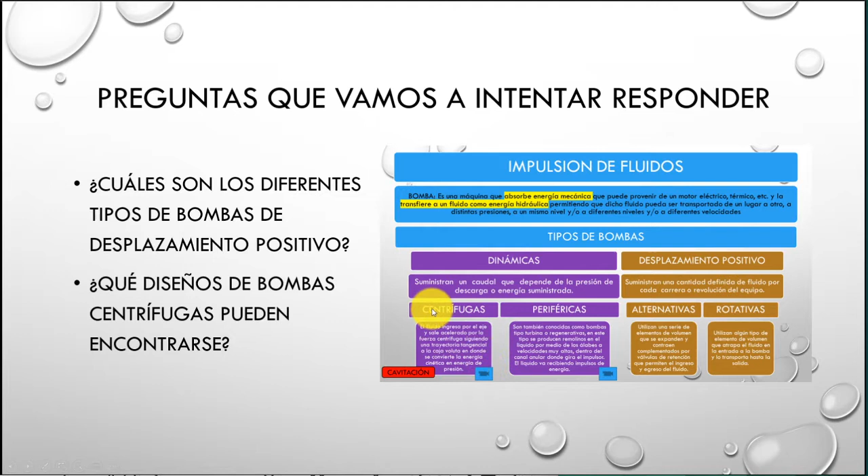Como vimos en el video anterior, hay dos grandes grupos de clasificación de bombas. Por un lado tenemos las bombas dinámicas y por otro lado tenemos las bombas del tipo de desplazamiento positivo. Ahora lo que vamos a hacer es avanzar en los distintos tipos de mecanismos de funcionamiento para los dos grandes grupos de bombas de desplazamiento positivo que vimos anteriormente, que eran las bombas del tipo alternativas y las bombas del tipo rotativas.

Así que ahora vamos a ver un video donde se describe en detalle cómo es el principio de funcionamiento de los 9 tipos de bombas de desplazamiento positivo que tenemos: 3 del tipo alternativas y 6 del tipo rotativas.

Hi, I'm Adam. This is the MachTech video blog, and today I'd like to talk a little bit about the different types of positive displacement pumps.

At first glance, there seem to be so many unique designs of positive displacement pump that it can be a little confusing. And it really wouldn't make a whole lot of sense to try and cover every single possibility in this one video. But what I have tried to do is to break it down into 9 basic mechanisms.

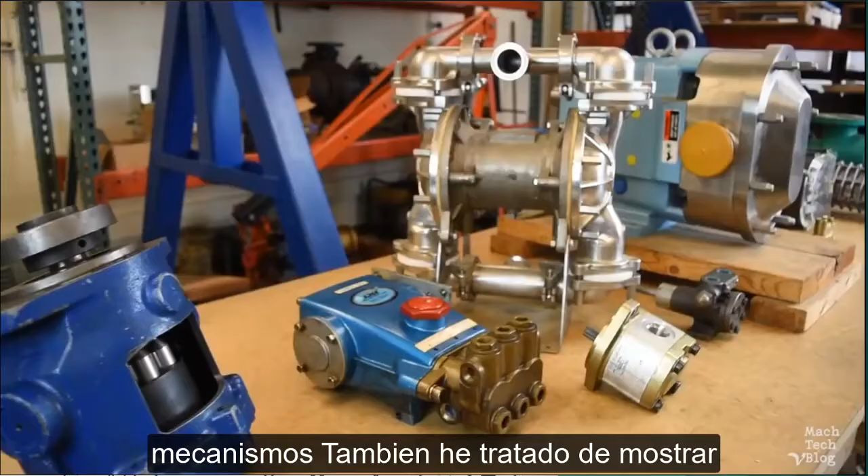At the heart of any pump, you'll find one of these mechanisms. I've also tried to show a real-world example of each different type of pump. Each basic mechanism falls within one of 2 categories based on what type of motion it utilizes.

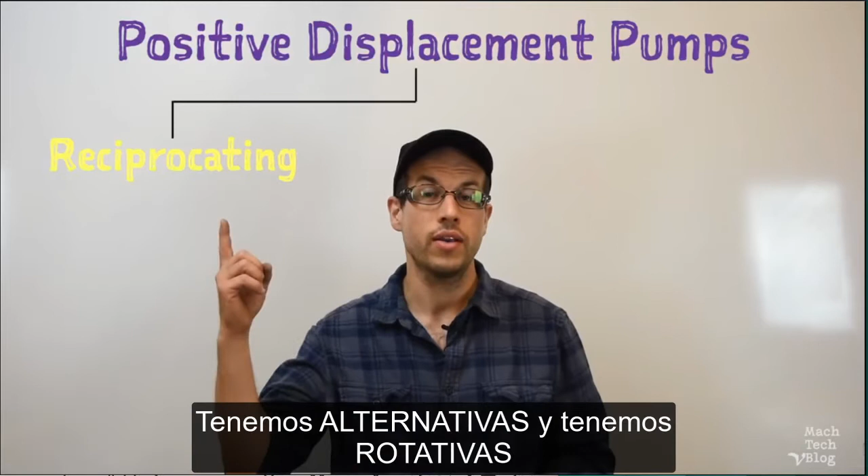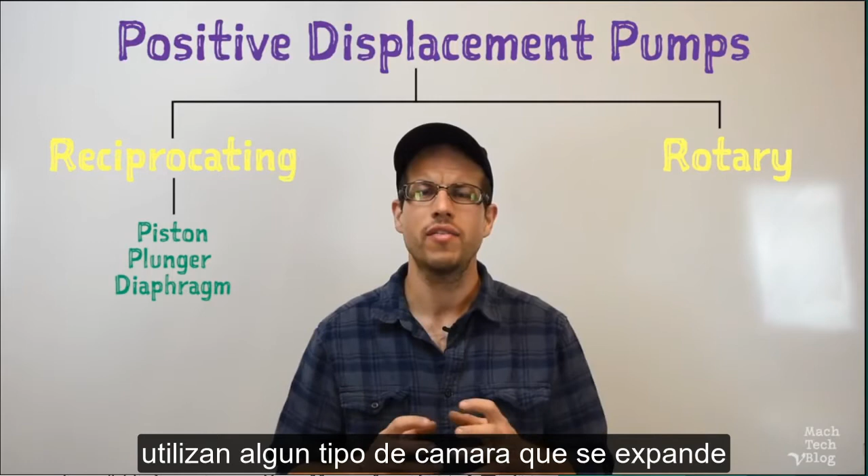We have reciprocating and we have rotary. Reciprocating pumps are the first category. Every reciprocating pump utilizes some kind of expanding and contracting chamber and a series of check valves in order to draw fluid into the pump and then direct it out into the system.

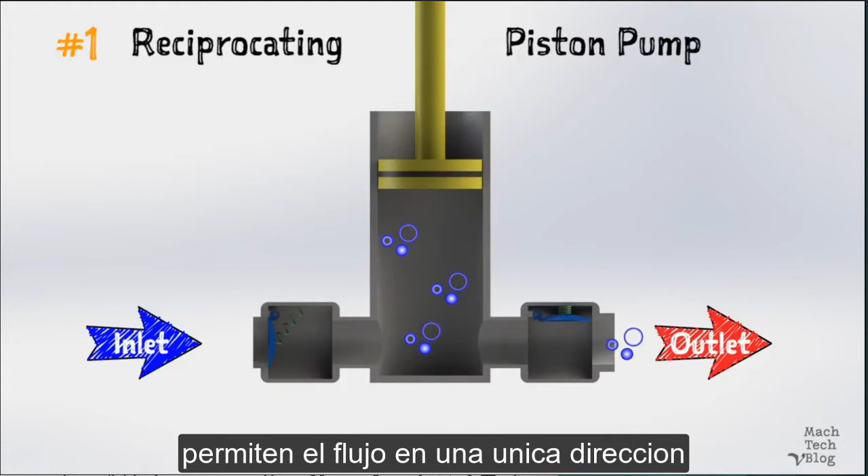To illustrate this concept, let's take a look at pump number 1, the piston pump. The mechanism consists of a reciprocating piston inside of a cylinder with check valves at both the inlet and the outlet. When the piston is on its suction stroke, which is the upstroke in this case, the chamber inside of the cylinder expands, the pressure drops, the check valve on the suction side opens, and fluid is admitted through the inlet.

By definition, check valves permit flow in one direction only, so they help to prevent backflow and direct the fluid through the pump. As the valve on the suction side of the pump opens, the valve on the discharge side closes. On the discharge stroke, which is the downstroke here, the piston pushes on the fluid in the cylinder. The pressure rises. The suction valve now closes and the discharge valve opens to release fluid into the system.

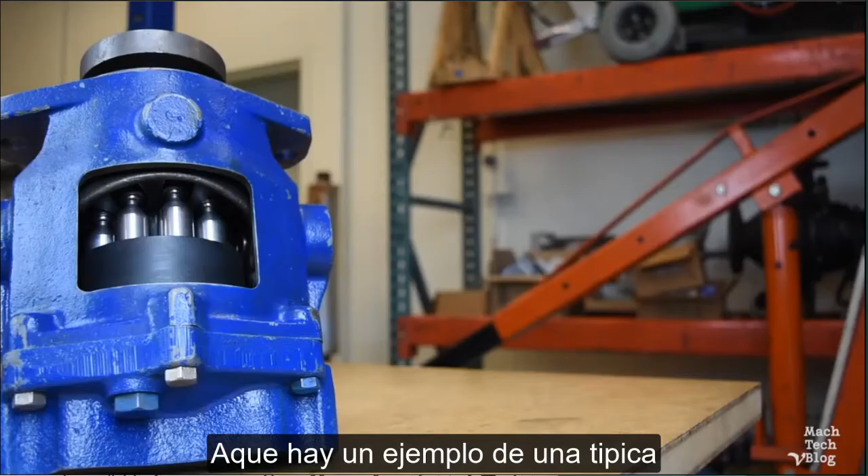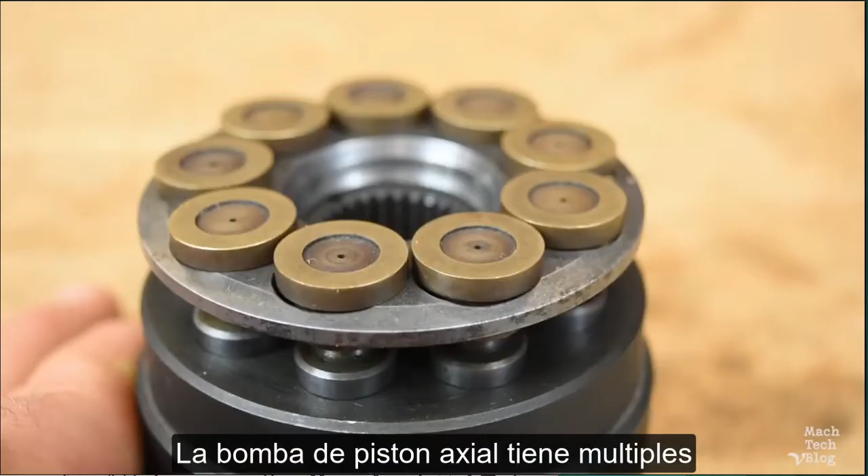Here's an example of a common piston pump called an axial piston pump. This pump is a tad more complex than our little demonstration, but the pumping action is generated in exactly the same way. The axial piston pump has multiple pistons equally spaced on the end of a rotating angled plate.

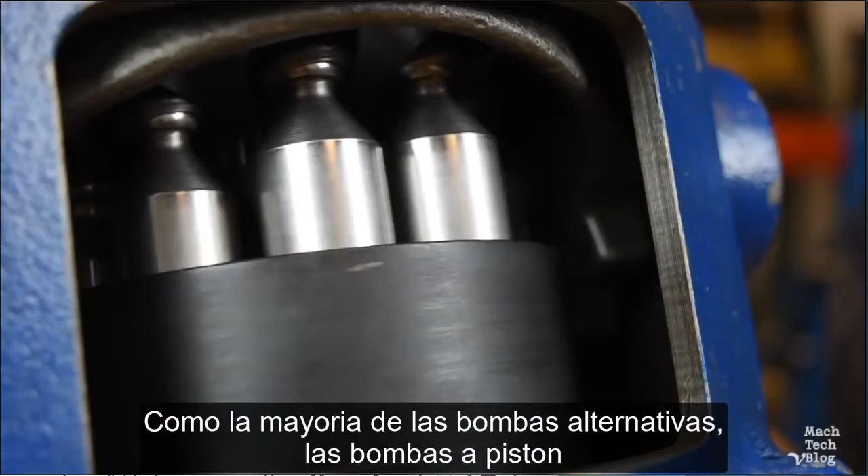As the plate rotates, the pistons are driven into and out of their respective cylinders. You can clearly see the motion here. Like most reciprocating pumps, piston pumps are relatively efficient and they're capable of generating very high pressures.

Pump number 2 is the plunger pump. Plunger pumps look very similar to piston pumps, but they work a little differently. Unlike a tight-fitting piston, a plunger fits loosely in its cylinder. Just like when your bathtub overflows because you filled it too full with water before jumping in, the physical mass of the plunger alters the size of the chamber and displaces the fluid.

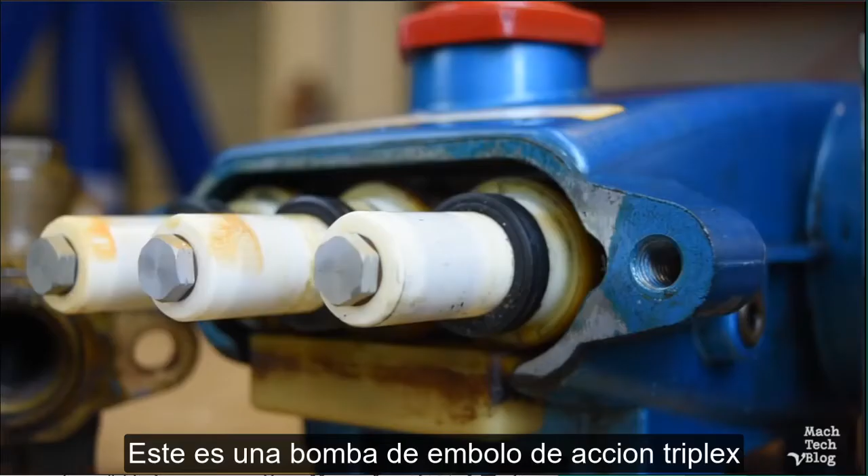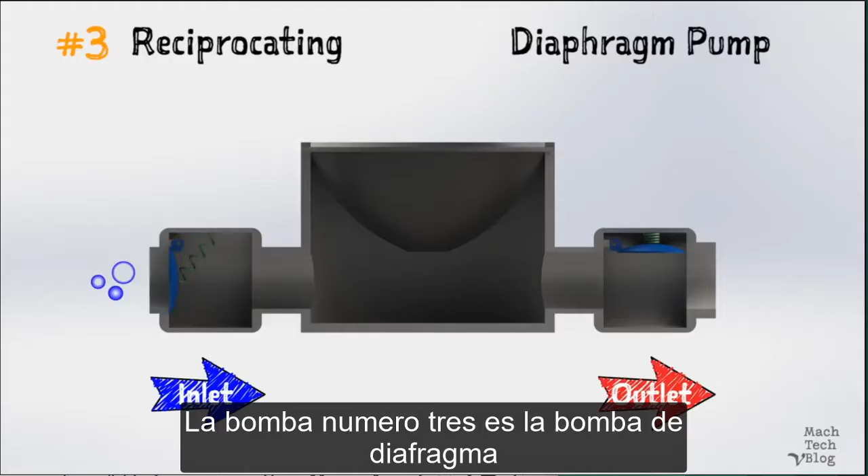This is a triplex plunger pump, which uses 3 staggered plungers for smoother flow delivery, but it is otherwise the same as our demonstration. Pump number 3 is the diaphragm pump.

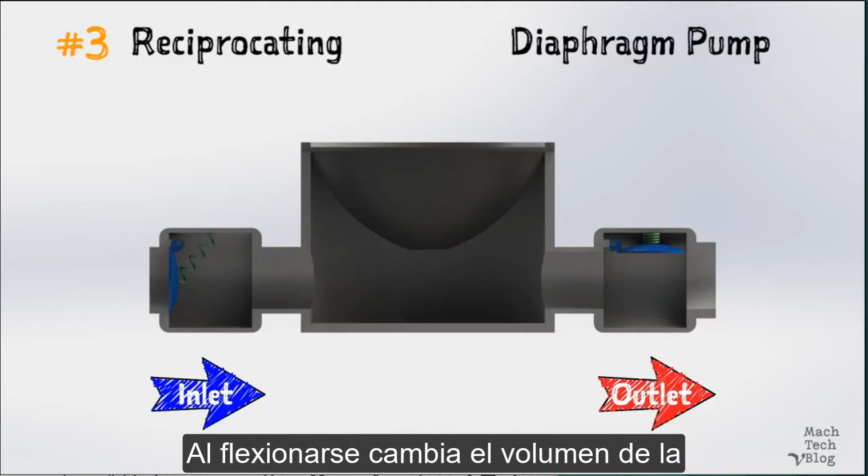Unlike a piston or a plunger, an elastomer diaphragm is flexible. When it flexes, it changes the volume of the chamber, causing fluid to be drawn into or pushed out of the chamber.

Our example is an air-powered double diaphragm pump. The pump is essentially 2 diaphragm pumps oriented back-to-back with the diaphragms linked by a connecting rod, so it can pump on both strokes. One unique property of the diaphragm pump is that it doesn't require a seal, because the wet and dry sections of the pump are completely separated by the diaphragm itself.

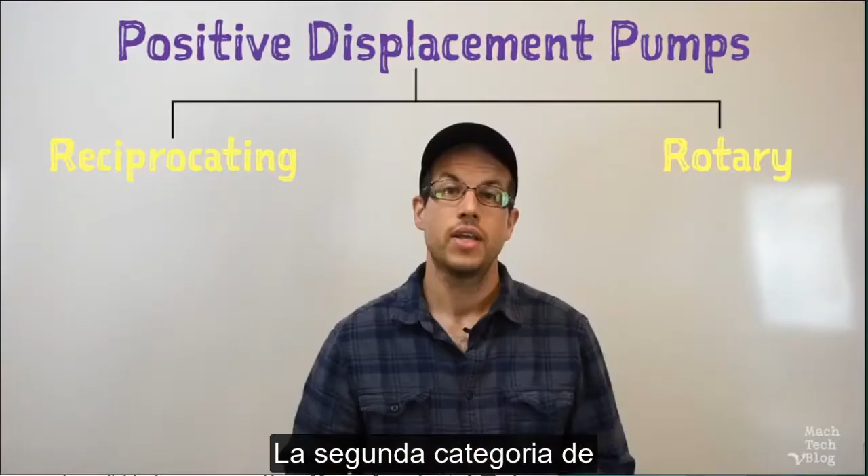The second category of positive displacement pump is the rotary pump. All rotary pumps utilize some kind of a moving chamber that traps fluid and carries it from one side of the pump to the other side.

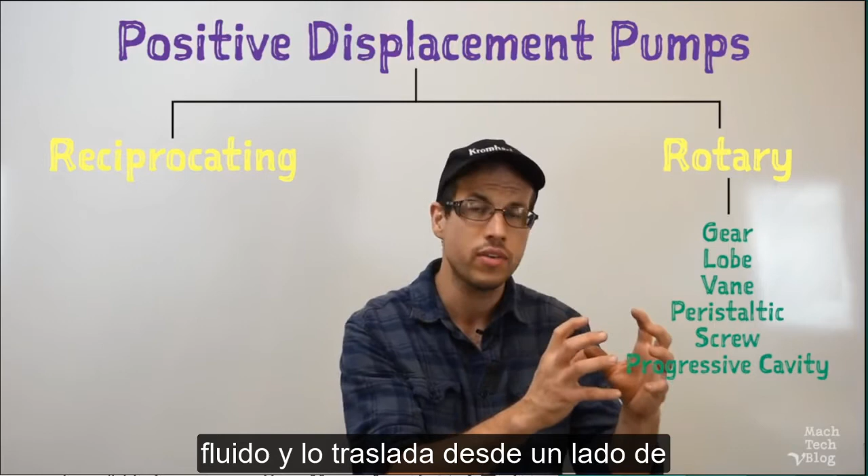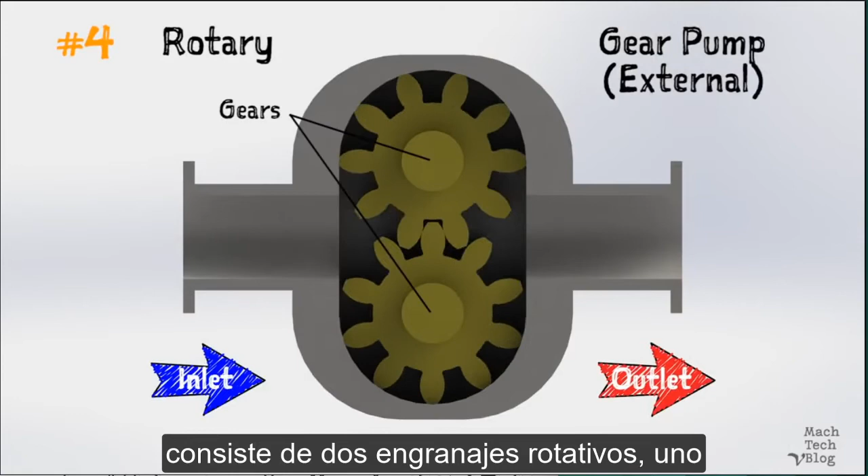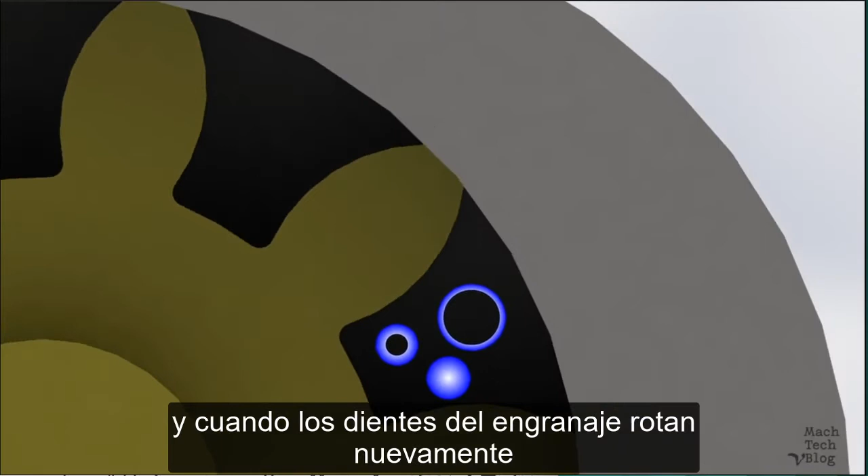To illustrate this concept, let's look at pump number 4, the gear pump. This configuration is more properly called an external gear pump. The mechanism consists of 2 rotating gears, one driving the other, inside of an oval housing. At the suction inlet, fluid is trapped in a chamber between the gear teeth and the inside wall of the housing. The rotary motion moves the chamber from one side of the housing to the other side, and as the gear teeth rotate back into mesh, the chamber is closed, forcing the fluid through the discharge outlet.

Another configuration of the gear mechanism is the internal gear pump. In this type of pump, an outer gear in a circular housing drives an offset inner gear. The gears are separated by a crescent. Fluid is trapped in one of 2 moving chambers, between the inner gear and the crescent, or between the outer gear and the crescent. As with the external gear pump, the rotary motion moves the chamber from one side of the housing to the other side, and as the gear teeth rotate back into mesh, the chamber is closed, forcing the fluid through the discharge outlet.

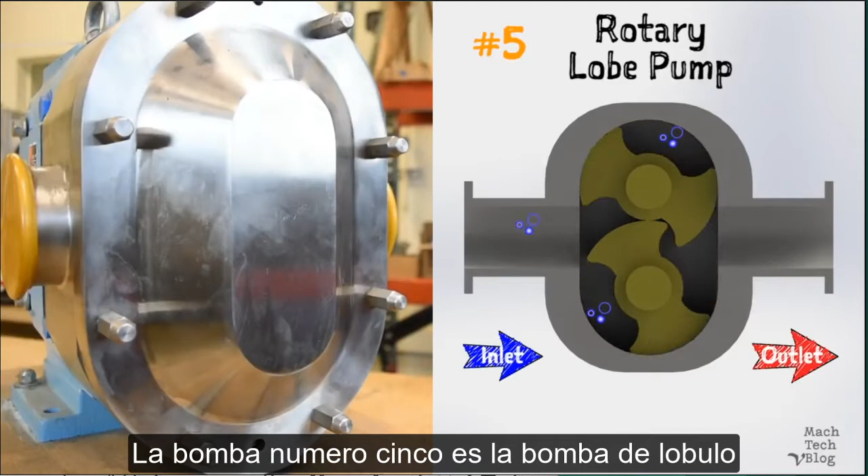Pump number 5 is the lobe pump. Lobe pumps function very similarly to external gear pumps, but the rotors are driven independently by external timing gears. The rotors have 2 or more lobes, and the moving chamber is formed between the outer surfaces of the lobes and the inside wall of the oval housing. As one of the lobes rotates back toward the center of the housing, the tight clearance between the lobe and the other rotor closes the chamber and forces the fluid through the discharge outlet.

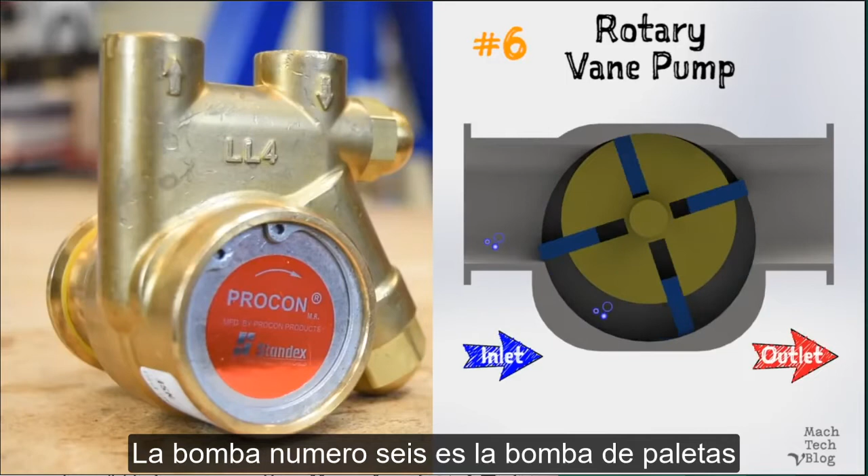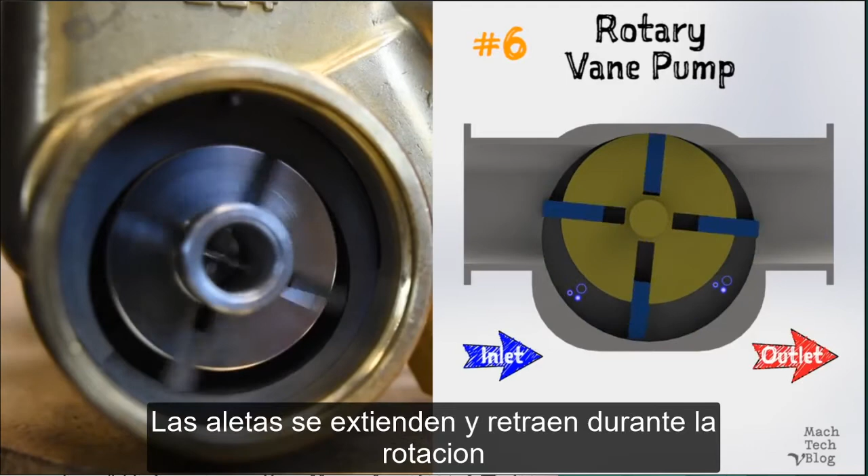Pump number 6 is the vane pump. A vane pump rotor has slots in it for sliding vanes. Centrifugal force flings the vanes out to contact the inside wall of the circular housing, forming a sealed chamber. Since the rotor is offset in the housing, the vanes extend and retract during rotation. The chamber increases in size at the suction inlet, drawing fluid in. At the discharge outlet, the chamber decreases in size, pushing fluid out. The nice thing about vane pumps is that they automatically compensate for wear because the vanes are constantly forced against the wall of the housing.

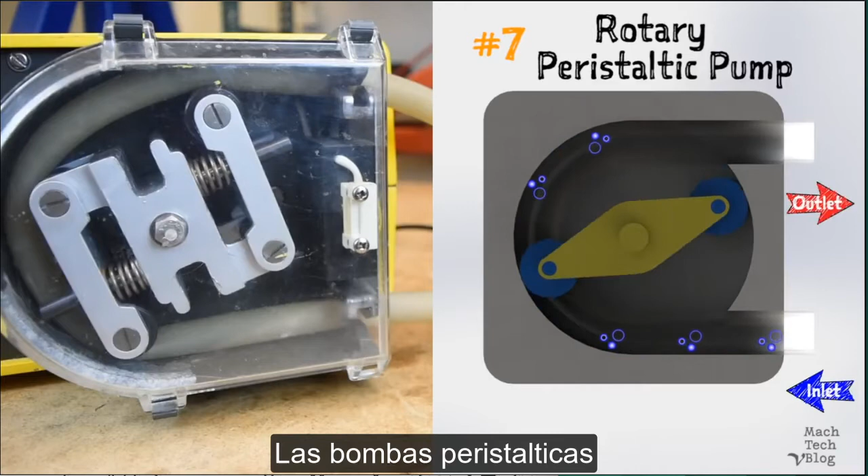Pump number 7 is the peristaltic pump. Peristaltic pumps contain fluid within a flexible hose. The hose is pinched between the rollers and the inside wall of the housing. As the rollers revolve around a center axis, they squeeze the fluid like a tube of toothpaste and move it through the housing to the discharge outlet. As with diaphragm pumps, peristaltic pumps do not require a seal because the fluid's completely contained inside the hose. They really excel at pumping high viscosity fluids with very large solids. I've even seen them pump whole cherries without significantly damaging them.

Pump number 8 is the screw pump. Screw pumps can have a single shaft with large threads on it, but they usually have 2 or 3. The center shaft drives the other shafts like a screw or a worm gear. As the shafts rotate in the housing, fluid trapped in the gaps between the screw threads progresses along the length of the housing and is delivered to the discharge outlet. If you've ever seen an auger or a screw conveyor, this is pretty much the same thing.

Our final pump is pump number 9, the progressive cavity pump. These bizarre little pumps may look somewhat like screw pumps, but they function differently. The rotor is shaped like a helix, and the housing is molded into the shape of a double helix. As the rotor rotates and oscillates inside of the housing, it forms a cavity which progresses along the length of the housing. Any fluid trapped in this progressing cavity is delivered to the discharge outlet.

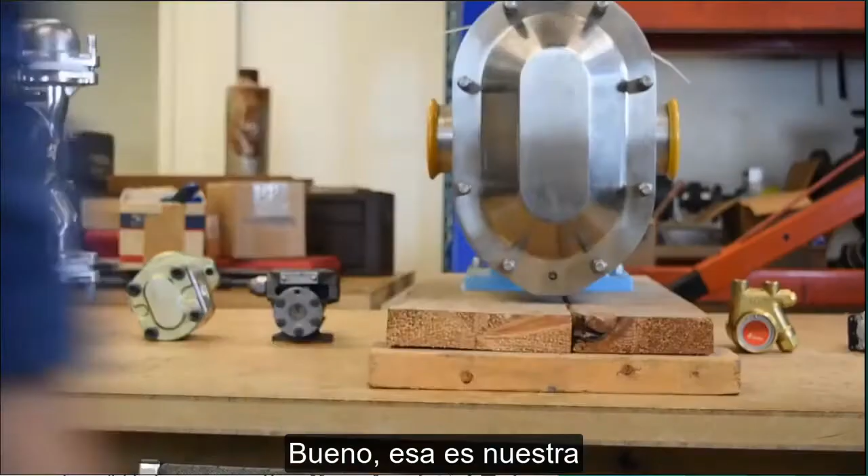Well, there's your introduction to the various different mechanisms that make up the positive displacement pumps. And that's it for today from the Mach Tech video blog. I hope you learned something.

When it comes to pumps, most operators only care about inputs and outputs. How much pressure does the pump generate? How much flow does it deliver? How much power is required to run it? But maintenance people need to know a few more details about the inner workings of these machines if we're going to be on the hook to keep them in good running order.

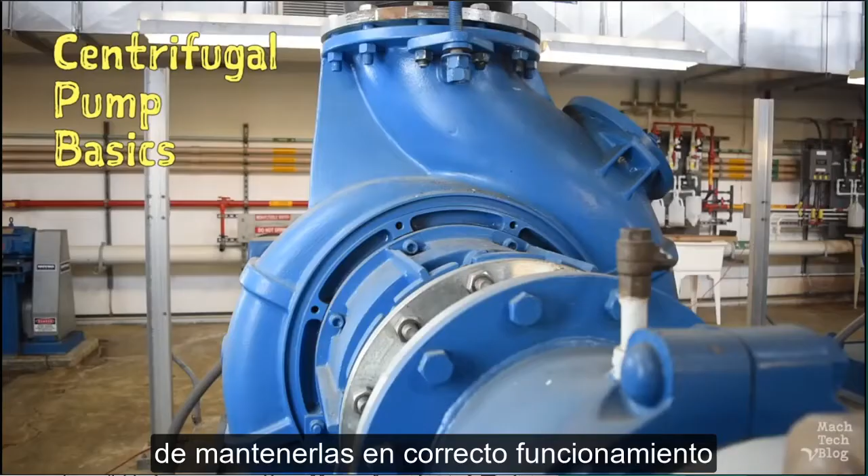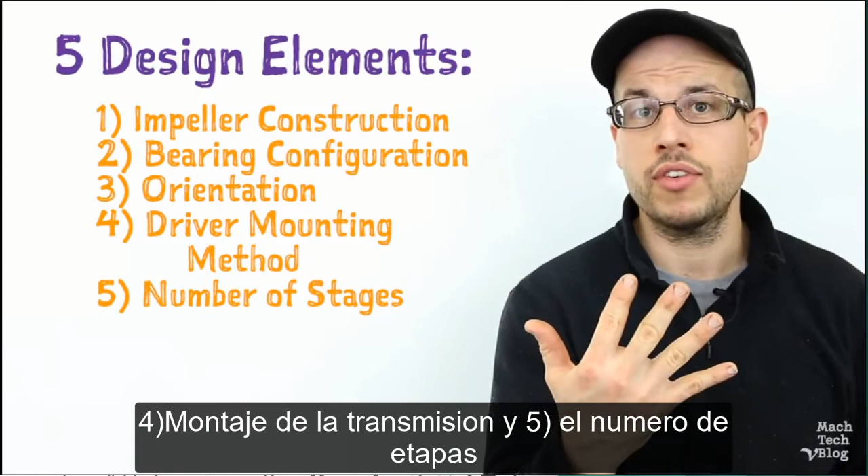We don't have time to cover the specifics of centrifugal pump operational theory here, but it was the topic of a previous video. Just as a refresher, centrifugal pumps get their name from the way they impart energy to fluid. When fluid enters the pump, it comes into contact with the rotating impeller and is thrown outward by centrifugal force. It travels through a specially shaped chamber called a volute and exits the pump at the discharge outlet. All centrifugal pumps share this basic operating principle, but there are a few possible variations among them. There are 5 primary design elements to consider: impeller construction, bearing configuration, orientation, driver mounting method, and the number of stages. There are a few special designs as well, but those will have to wait for their own videos.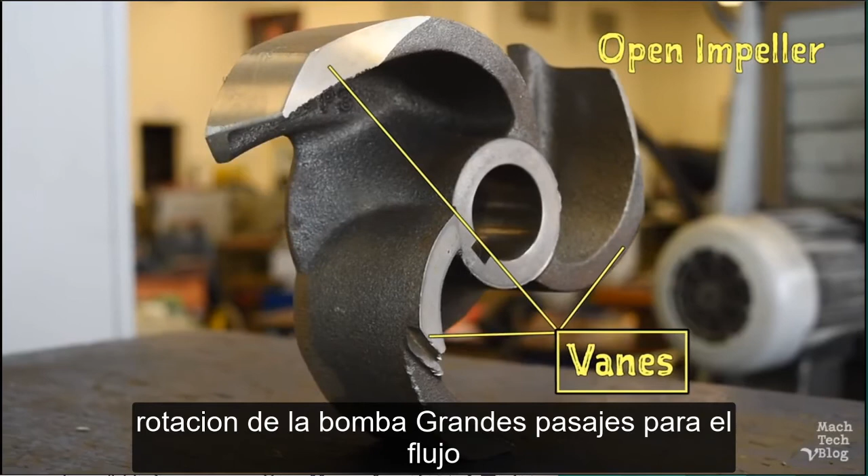There are 3 types of impeller: open, semi-closed, and closed. The simplest impeller construction is the open impeller, which consists of nothing more than a few curved blade-like vanes equally spaced around a hub on the rotating pump shaft. Large, unrestricted fluid pathways allow this type of impeller to pump fluid containing mud, leaves, twigs, sand, sludge, spray paint caps, dead birds, you name it.

And that makes them ideal for trash pumps or this pump, which actually came out of a wastewater treatment plant where it was pumping raw sewage. It was necessary to handle gritty slurries with soft solids. And it even has special chopper blades just ahead of the impeller to help break down very large solids.

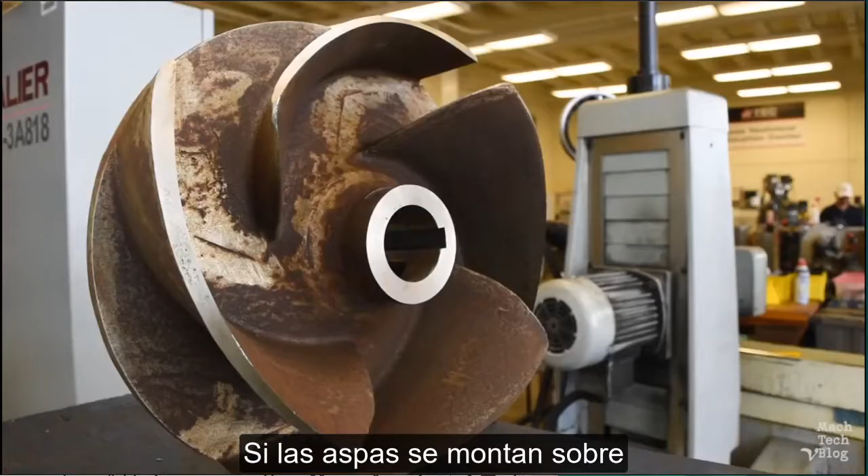If the vanes are mounted on a backing plate called a shroud, then the impeller is a semi-closed impeller. And if the vanes are sandwiched between two shrouds, then it's a closed impeller.

Closed impellers are more efficient than either semi-closed or open impellers because the fluid is directed through very well-defined pathways. That means more of the fluid is pumped out into the system and less of it is just recirculated around and around inside of the pump. Of course, the trade-off is that they can very easily get clogged with debris.

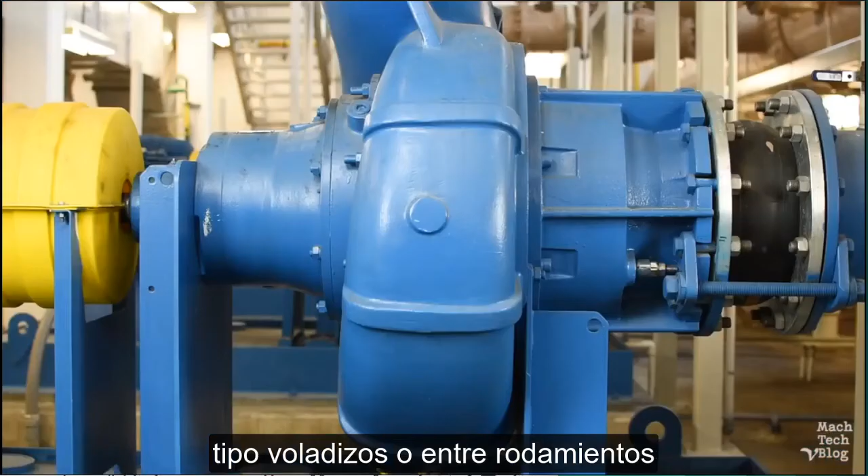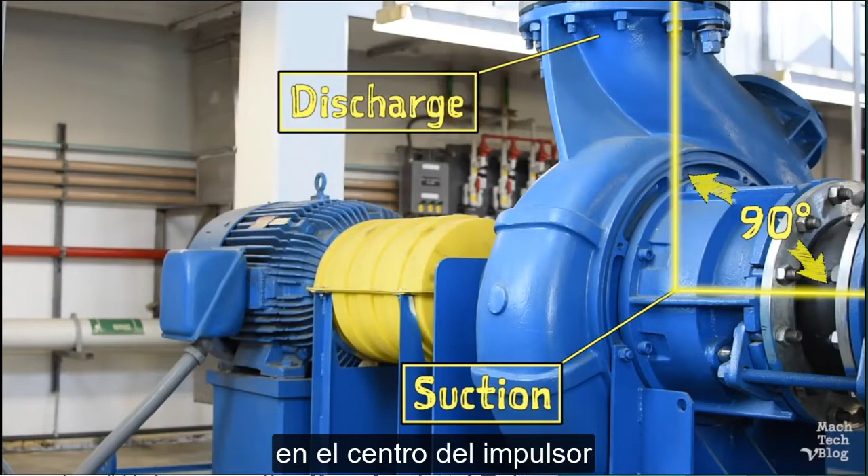Whichever style of impeller is used in a pump, it's mounted on a rotating shaft and needs to be supported by bearings inside of the casing in one of two ways: either overhung or between bearings. In an overhung configuration, the impeller is cantilevered on one end of the shaft and the bearings are offset to the other side. This configuration places the suction and discharge piping at 90 degrees to one another, with the inlet directly in front of the suction eye at the center of the impeller. This is why pumps with overhung impellers are more commonly referred to as end suction pumps.

End suction pumps are abundant in industry because they're relatively cheap and easy to manufacture, but they do have one big disadvantage arising from the way fluid travels through the pump.

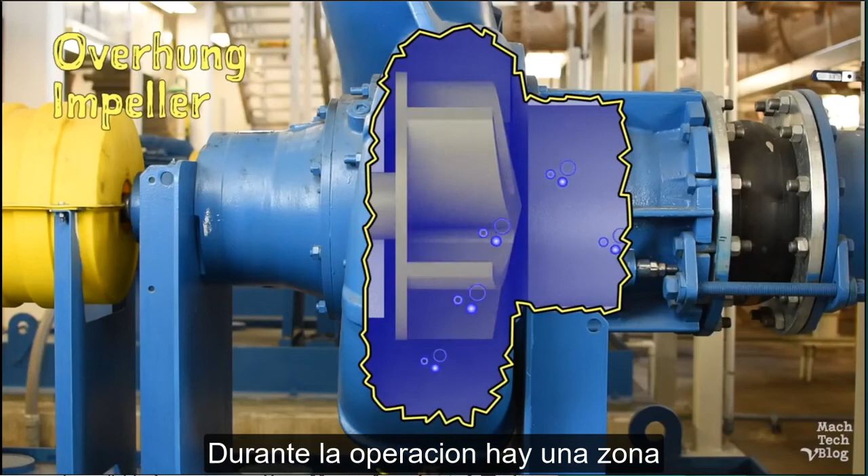During operation, there's a zone of low pressure at the suction eye where fluid first enters the impeller, and a zone of high pressure at the outside rim of the impeller where the energized fluid is released into the volute chamber. This high-pressure fluid also has a leak path to the backside of semi-closed and closed impellers, which totally throws off the balance of pressure.

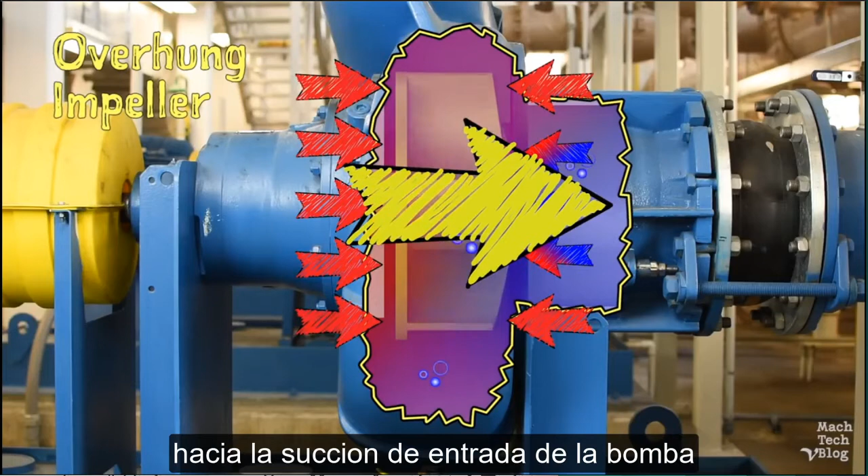The net effect is a constant axial force, or thrust load, pushing the impeller toward the suction inlet of the pump. You can compensate for this a little by installing beefier bearings capable of handling thrust loads, or drilling holes through the impeller shroud to allow for some pressure equalization. But neither of these are true fixes for the problem.

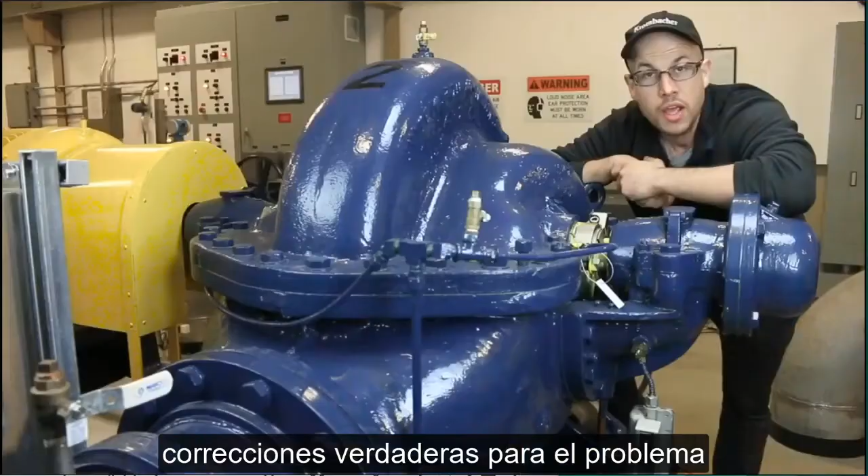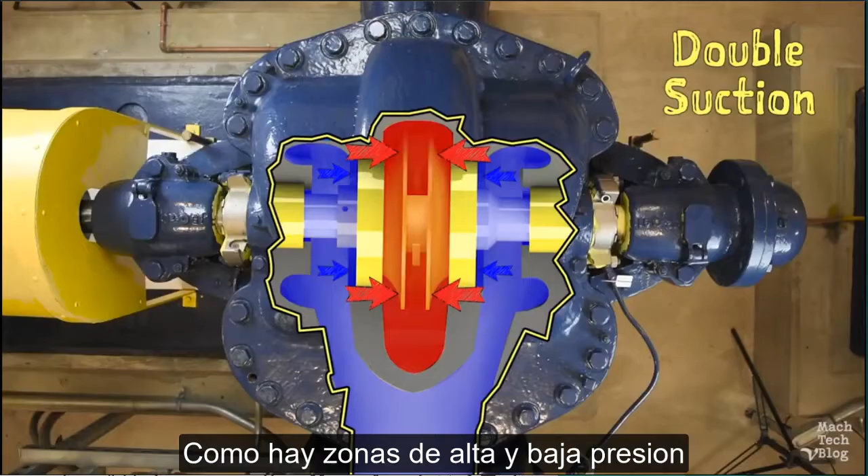A more effective solution is if the impeller is supported by bearings on both sides, called a between bearings configuration. Not only does this generally improve shaft support, it also means many of these pumps can employ symmetrical closed impellers with double suction. Since there are identical low and high pressure zones on both sides of the impeller, this effectively eliminates thrust forces due to pressure imbalance. And this design has another key advantage.

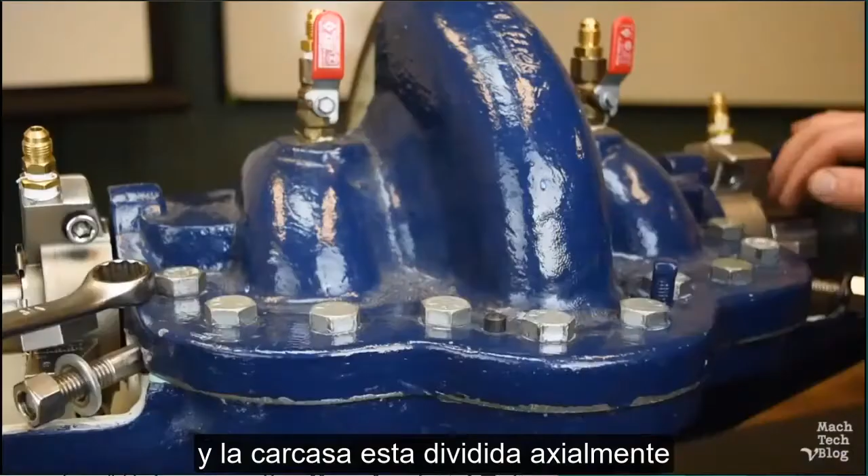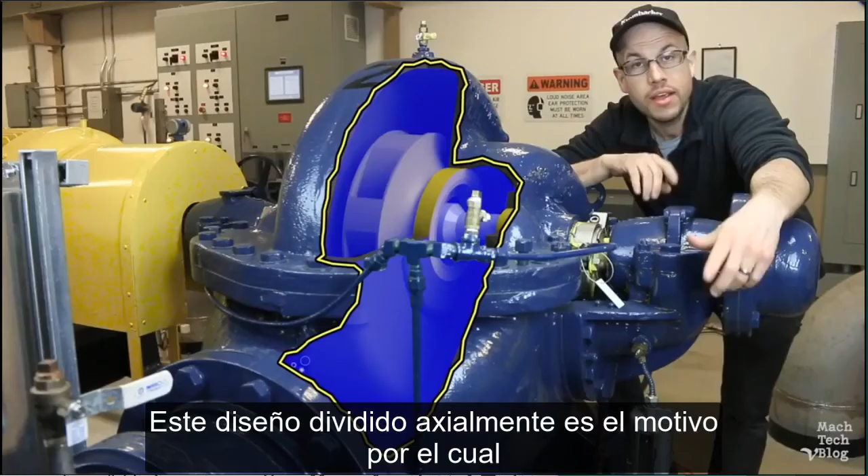The suction and discharge piping are normally positioned parallel to one another on opposite sides of the pump, and the casing is split axially, so that just by removing some bolts and pulling the cover off, maintenance technicians can access the rotating assembly inside the pump without removing the whole pump from the system. This axially split design is why pumps with impellers between bearings are more commonly referred to as split-case pumps.

Now, those are all pretty convincing reasons to go run out and get yourself a split-case pump right now, but of course there has to be a disadvantage. Because the manufacturing processes and sealing requirements for split-case pumps are much more elaborate than for end suction pumps, they're also naturally more expensive.

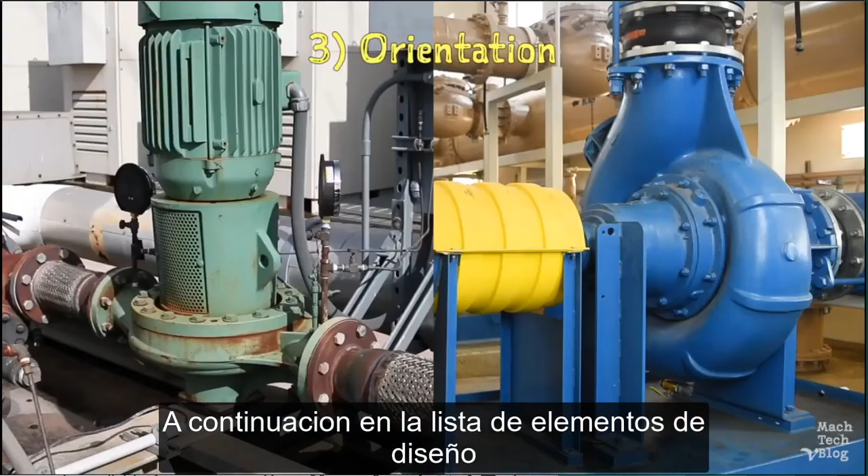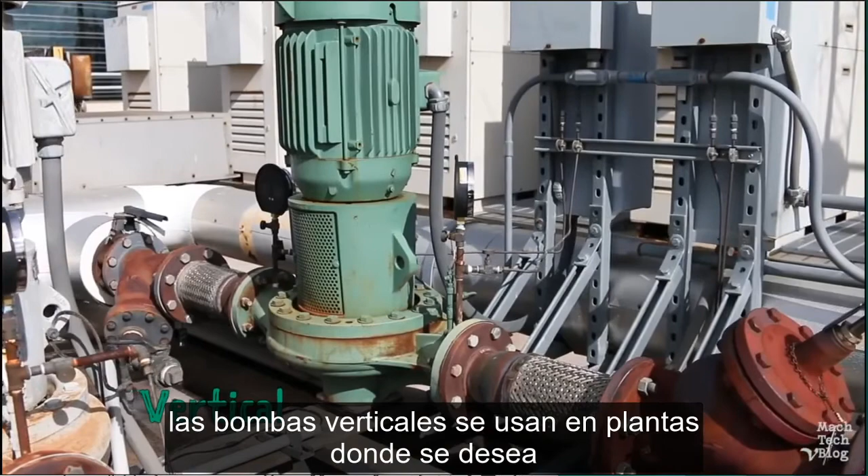Next on the list of design elements is orientation, either horizontal or vertical relative to the pump shaft. Centrifugal pumps are usually oriented horizontally, but they can also be oriented vertically. Vertical pumps are used in plants where a reduced footprint and space savings are desirable. And you may also find one down at the bottom of a well or sump connected through a long line shaft to the driver above.

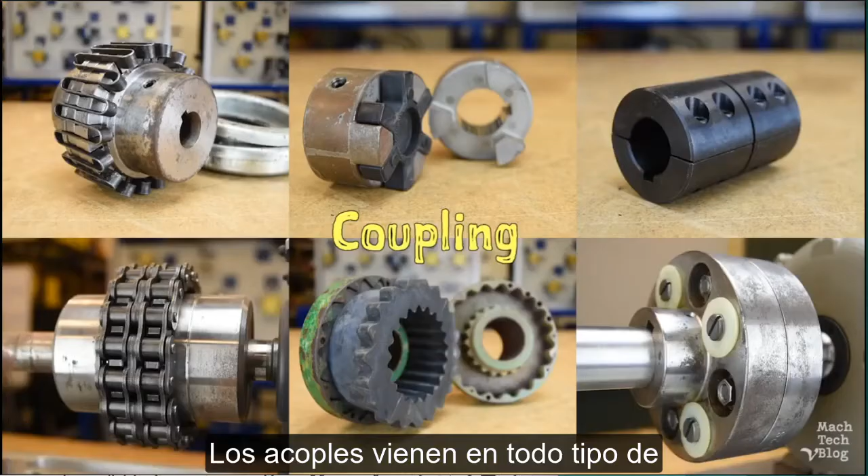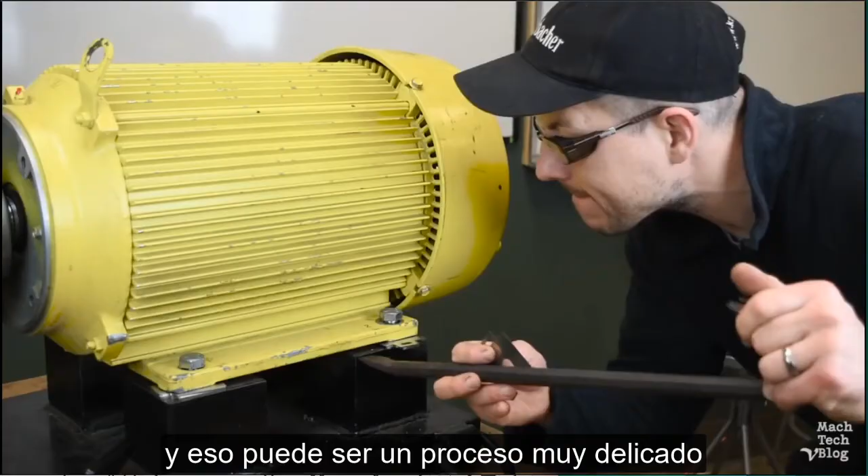This brings us to the mounting method of the driver, usually an electric motor. There are two options for transmitting rotational force from the driver to the pump: either frame-mounted or close-coupled. If the pump and driver are two separate units, as they are here, then the pump and driver shafts will need to be connected by some type of coupling. Now, couplings come in all shapes, sizes, and styles. But one characteristic common to all of them is that they require proper alignment of the shafts, and that can be a very finicky process indeed.

To help facilitate and maintain machine alignment, the pump and driver are mounted on a common base plate, or in the case of units oriented vertically, the driver is mounted above the pump on a structural support called a C-frame. This type of pump and driver unit is said to be frame-mounted. For large, heavy equipment and for all split-case pumps, frame mounting is really the only way to go.

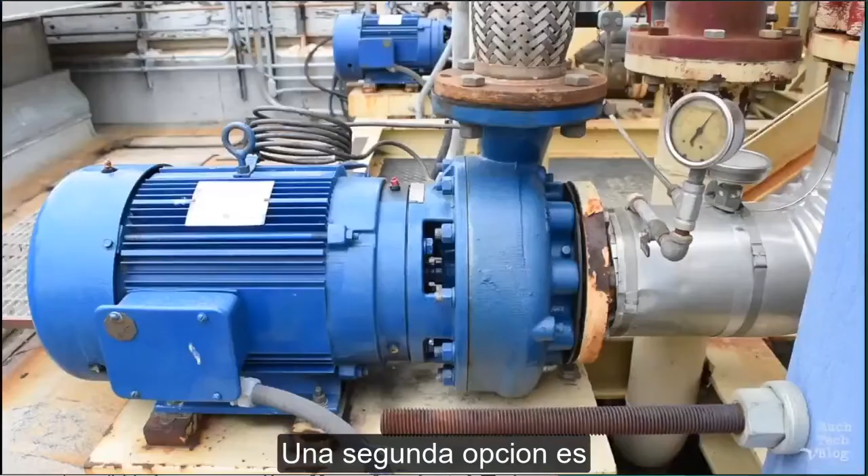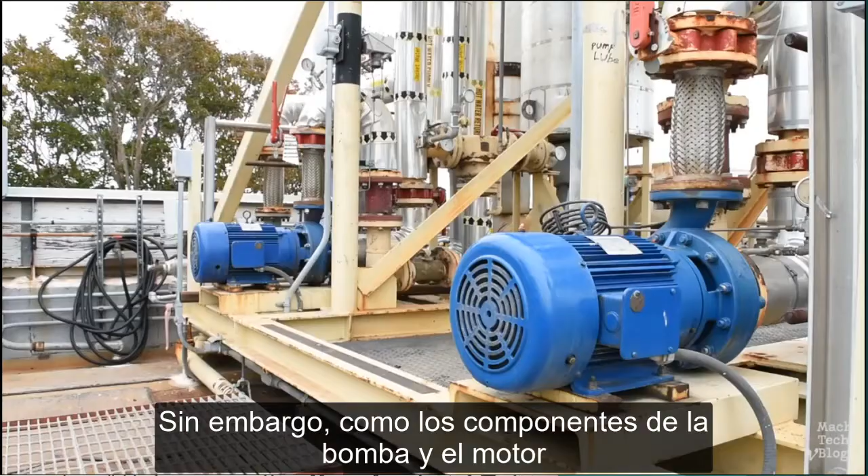A second option is the close-coupled mounting method, in which the pump and its driver share a common shaft, with the impeller mounted overhung on one side of the driver shaft. In this case, there is no need for a coupling or any of the extra labor required to perform sensitive alignment procedures. However, since both the pump components and the driver components are supported on the same shaft just by the bearings in the driver, this mounting method is really only appropriate for small and medium-sized end suction pumps.

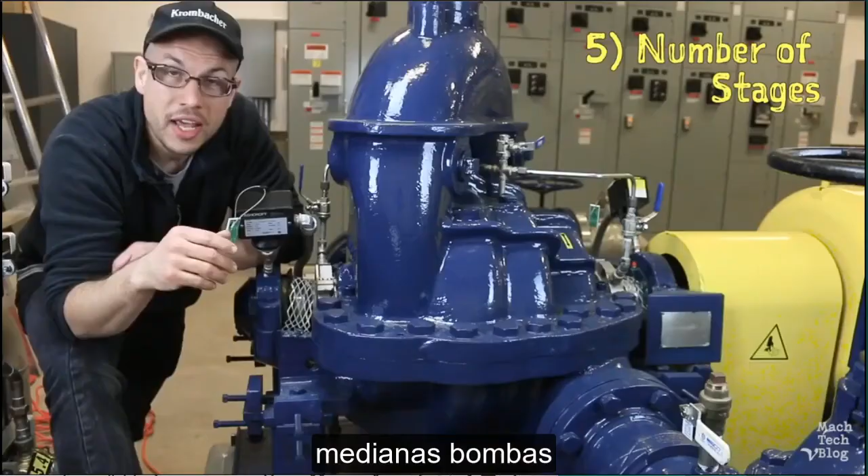Finally, a pump can be classified by how many stages it has.

Most pumps have one stage with a single impeller and a single volute chamber. However, some pumps have additional stages connected in series to help boost the pump's discharge pressure.

The idea is that the first impeller adds energy to the fluid and then feeds it into the next impeller, which adds more energy to the fluid, then feeds it to the next impeller, and so on and so forth until the fluid is eventually discharged into the system.

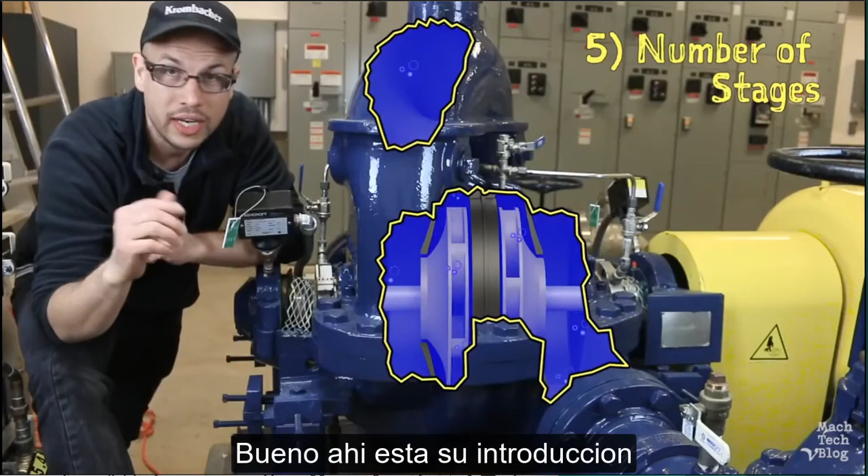Well, there's your introduction to the different classifications used for centrifugal pumps: impeller construction, bearing configuration, orientation, driver mounting method, and the number of stages.